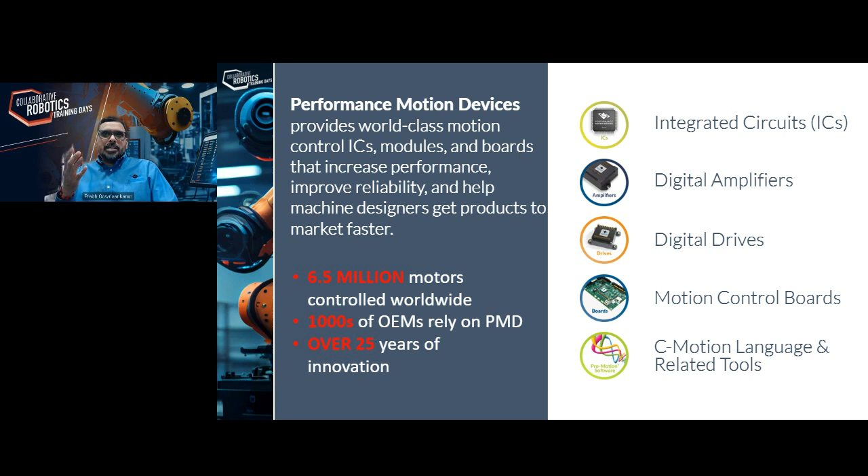And so the force sensing function may not require separate hardware. Just the controller used to control the linear actuator or motor can be used in sophisticated motor control techniques, so we'll take a look at that. Especially in the cobot case, there's a lot of force control and force feedback that you have to apply, and you can implement a lot of these in terms of algorithms for force control.

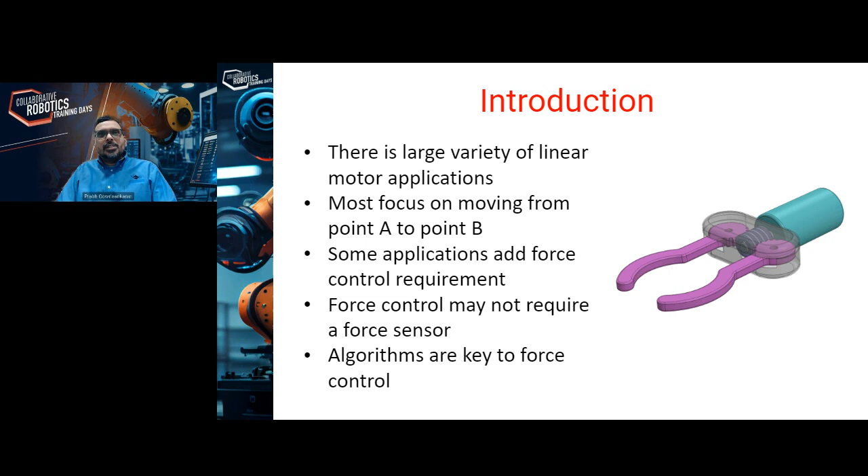So just to dive a little deeper into linear actuators, there are two different types. If you look at end effectors, you typically have linear servo actuators. There are a few different varieties, but the most common configuration is a rotary motor used to create linear motion. The rotary motor is often a DC brush or brushless DC motor, although step motors can be used. As the motor rotates, a mechanism such as a lead screw converts the rotary motion into linear motion. They come in lots of different sizes, strokes, and force output. These actuators are characterized by high force output, moderate speed, and moderate positioning accuracy.

So the range of applications of this type of actuator is vast. It includes electronic manufacturing, so you look at pick and place kind of machines, semiconductor equipment, biotech. You see it a lot in robotics and industrial automation.

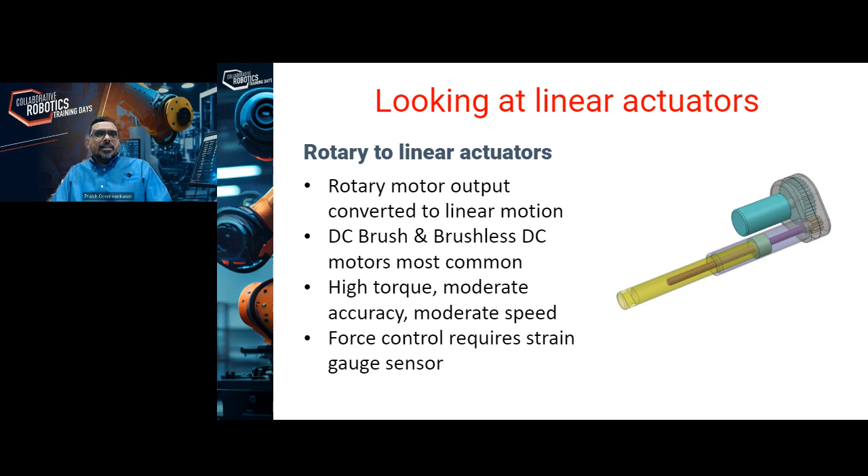So just diving in, we'll walk through a few different types that we have seen as part of controlling these motors.

A secondary category of these linear servo actuators is these direct drive brushless DC motors. They are like a normal rotary brushless motor, but these are commutated servo controlled motors, which typically use an encoder for position control. The direct drive here means the linear motion is directly generated by the motor coils and magnets. There's no lead screw or gears or pulleys needed to convert rotary to linear motion. So the linear version of a brushless DC motor is essentially an unwrapped version of a rotary motor.

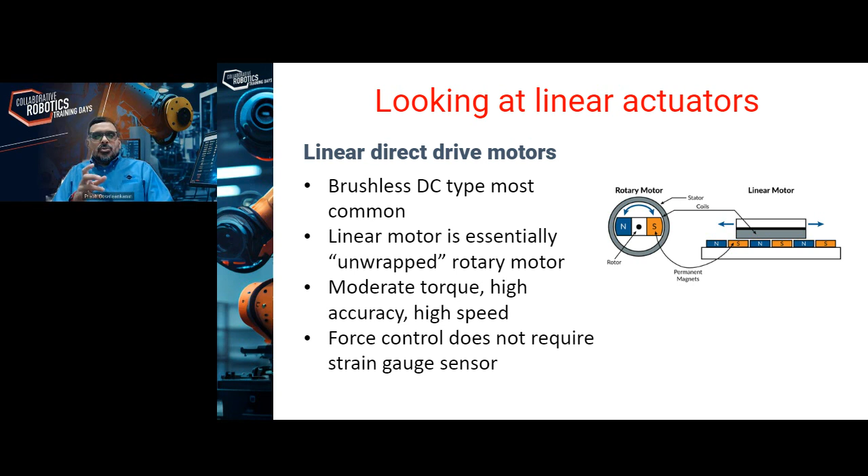Looking at a few different configurations of linear actuators, there are typically two different configurations possible for both the stator and rotor. The stator, which is part of the coil, is stationary, and the rotor, which is the moving part, is where the magnets are. In the first picture, the coil, which is the stator, is stationary, and the rotor, the part with the magnet, moves. In the second one, the stator moves, meaning the coils move and the magnets are stationary. The choice of configuration comes down to cost and mechanical considerations.

It depends on how long your stroke is and how big your XY table is. It tends to lean itself to one of these choices. The longer stroke devices often reverse what happens, with the smaller stator assembly moving along a relatively long track. So a longer stroke device usually uses the configuration on the right, and shorter stroke devices use the configuration on the left. But both are controlled similarly, giving a similar servo brushless kind of control.

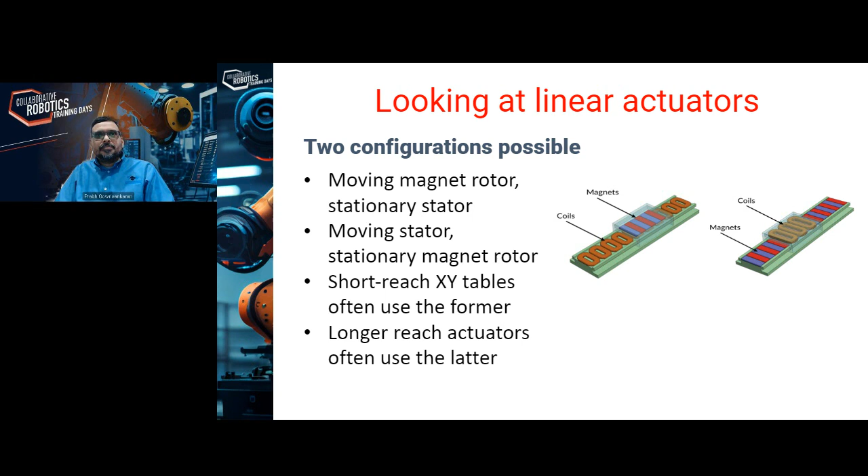There's one more direct drive configuration we have seen, which is a rod-shaped rotor as opposed to a track shown in the previous slide. The rod contains the magnets, and as before, either the rod can move with the stator being stationary, which is the coils, or the stator can move along the line.

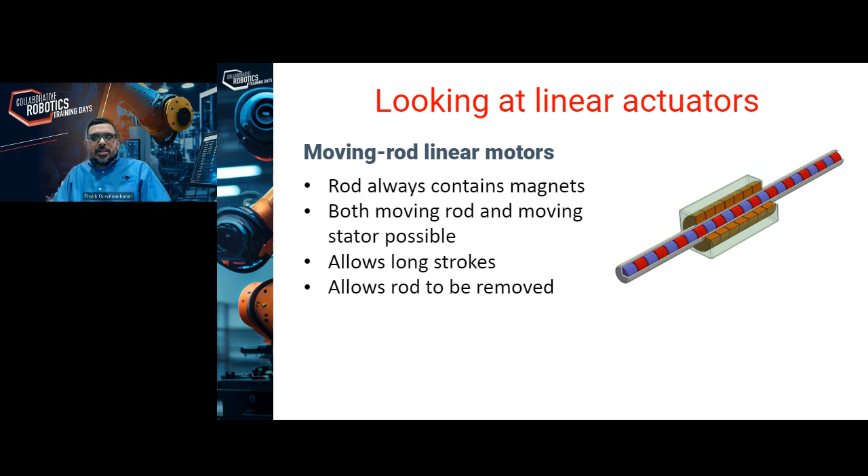Whichever arrangement you use, the brushless DC motor is the workhorse for applications needing high precision, high reliability, and quick response time. Compared to rotary ones, linear actuator direct drive motors have very high acceleration and moderate torque output. Although direct drive motors are expensive, you still find them in lots of different industries, especially where you want high precision motion.

This other category of direct drive linear actuators is linear DC motors. It has two flavors: a moving magnetic rod arrangement and a voice coil arrangement. The voice coil is something a lot of people are familiar with. The magnetic rod style DC linear actuator can deliver modest torque and speeds with a small to modest stroke distance. Its main advantage is its lower cost and simplicity. The voice coil actuator reverses the role of the stator and the rod magnets. The actuator has a shorter stroke, modest torque output, but extremely fast response time.

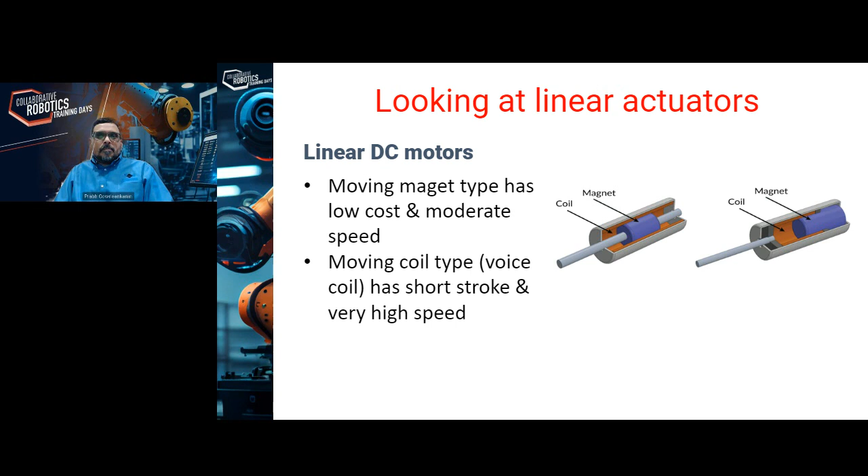So now that we have a background on a few different types of linear actuators and direct drive motors, we want to jump into how you control force. What are the force control key concepts?

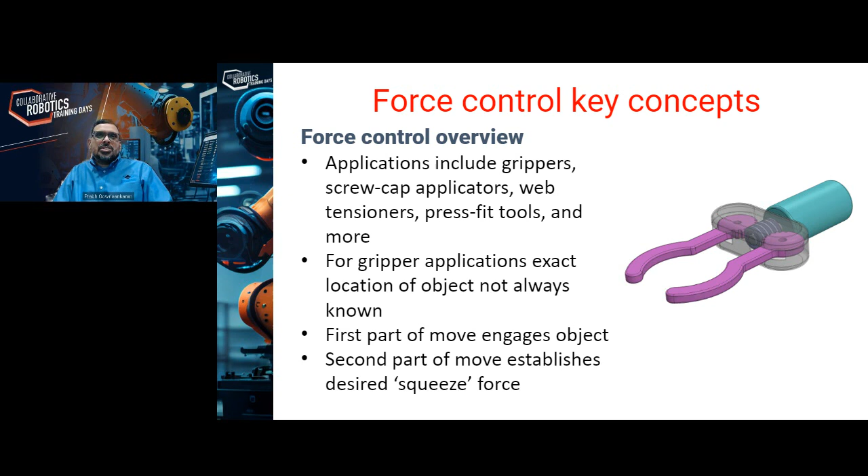If you look at applications where force control is key, there's gripper applications in the cobot space, screw cap applicators, press fit machinery, packaging. There are a lot of different use cases where force control is critical. The first part of the move engages the object, where you try to squeeze it. The second part establishes the actual squeeze force. As we go along with the slides, we'll show you how you can achieve this control, both with and without sensors.

So here you're looking at two different techniques. The first one we call the position determines the force grip method. In this approach, the actuator is controlled by a servo PID loop in our motor controller. PID stands for proportional integral derivative. It continuously monitors the motor torque output command.

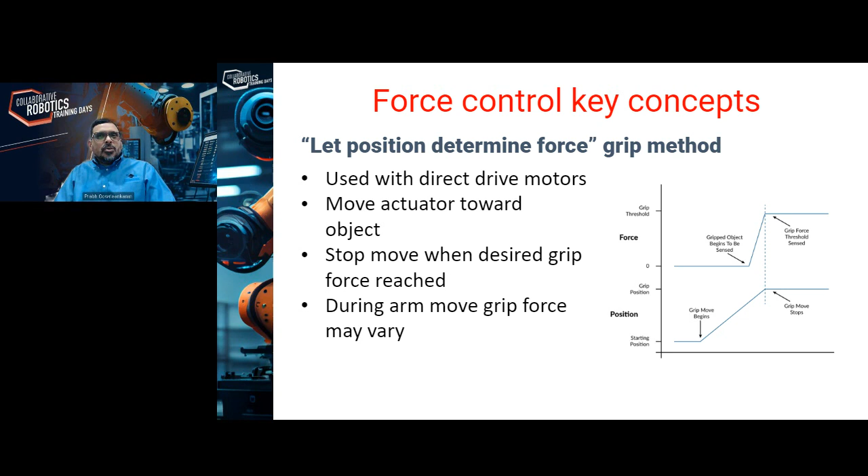The other method is where you apply a very specific force limit. We call this the set explicit force limit method. The gripper similarly approaches the object using a commanded trajectory move, but the servo loop does not monitor the force output or halt the trajectory when a threshold is reached. Instead, a current output limit is programmed into the servo loop, so that even if the PID tries to follow the trajectory, the force it can apply is limited.

It stops, the force applied is limited based on the current, and then you can continue traversing. So the trajectory doesn't end, you can continue through your path. If the object being gripped compliantly deforms or presents a different force during the actuation, the actuator position will move forward or backward in such a way that it applies the threshold grip force. These are two common techniques we've seen for force control.

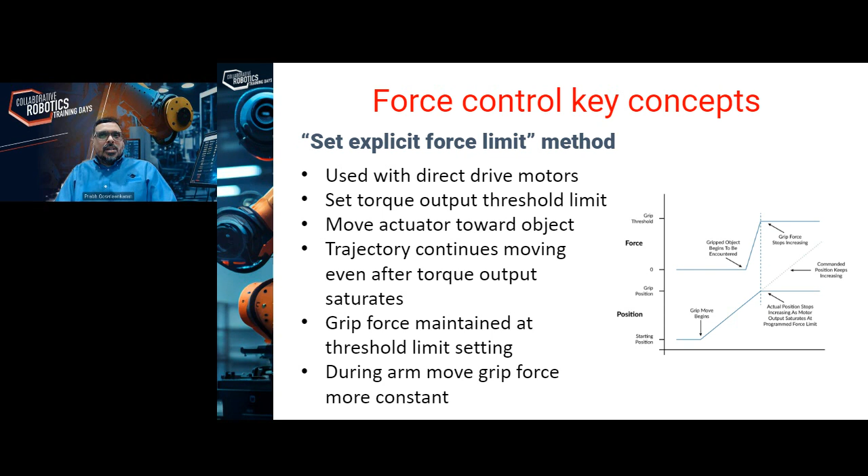As mentioned earlier, the key assumption of actual force control, if you don't have an external sensor, is that there's only a small amount of friction between the direct drive actuator and the object being controlled. So the coil current you get back is a clear indication of the force. But even geared motors can sense force if the gear ratio is modest and the gearbox is low friction.

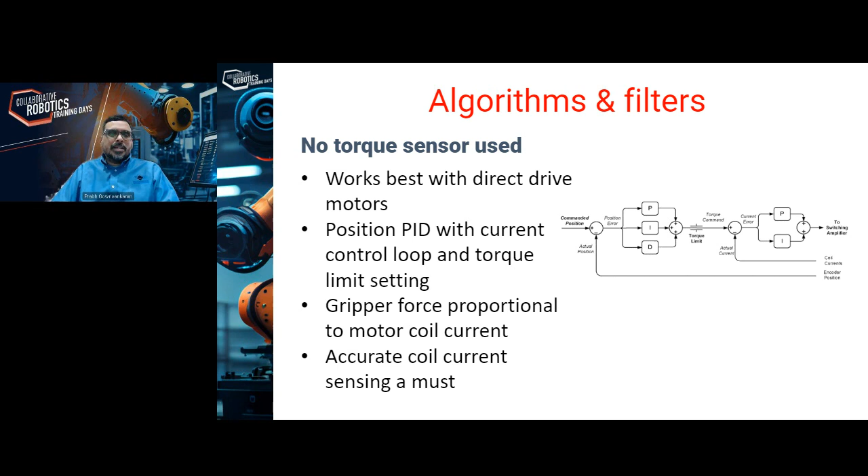The other methodology we see is where a torque sensor is used. So in this particular case, it's typically common where you have like a lead screw rotary to linear actuation or some other mechanical structure, with belts and stuff, where it's hard to measure, where the current doesn't directly respond to the force applied.

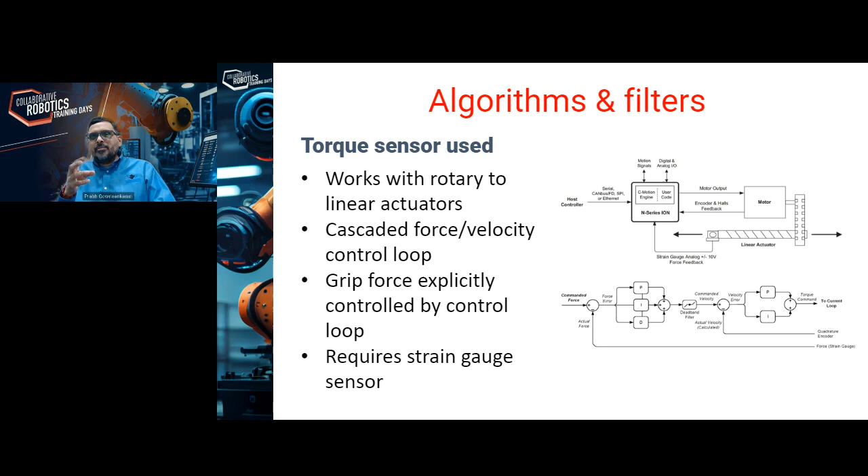This is the second one where the grip force is controlled, and then you can continue to traverse in your trajectory. Here a strain gauge is used, populated through an analog input to the drive. The commanded force is compared with the actual force measurement from the strain gauge, and the PID loop controls the force error. Then we'll talk about the deadband filter, and you control the velocity as a second stage.

As we talked about, there's also a bandpass filter in the middle. In a lot of these cascaded force velocity loops, what you see is you need a filter in the middle, called a deadband filter. It's usually put in there to reduce hunting. So when the needed velocity command is close to zero, it's not truly zero, but it's kind of close to it.

You can set a threshold, and this deadband filter will allow you to result in quieter operation, right? So where you're not hunting for the exact zero, where the precision is not needed, you want to be close enough to zero, within a certain threshold. This helps improve the loop stability, so it's not constantly trying to get to zero, and it reduces noise and saves energy.

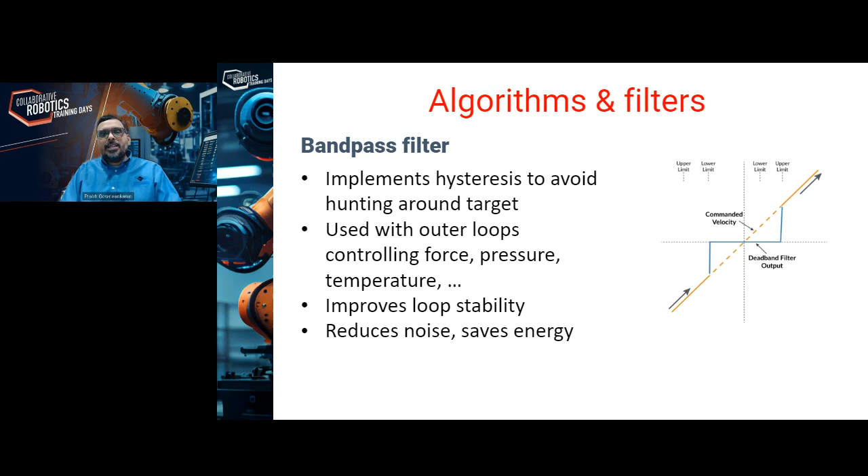So just to summarize, we walked through the different types of linear actuators. I know there's a lot of details here, but all the slides are available offline. So you can look at the different types of linear actuators available for your design, depending on whether you want high torque output, accuracy, or speed and acceleration, you can choose the type of linear actuator and linear drive to use.

And then again, you have a few different ways of controlling it. You could do position determines force methodology, or torque limit determines force. And you could use an external strain gauge or a torque sensor back onto an analog input. So there's a few different ways to control the force.

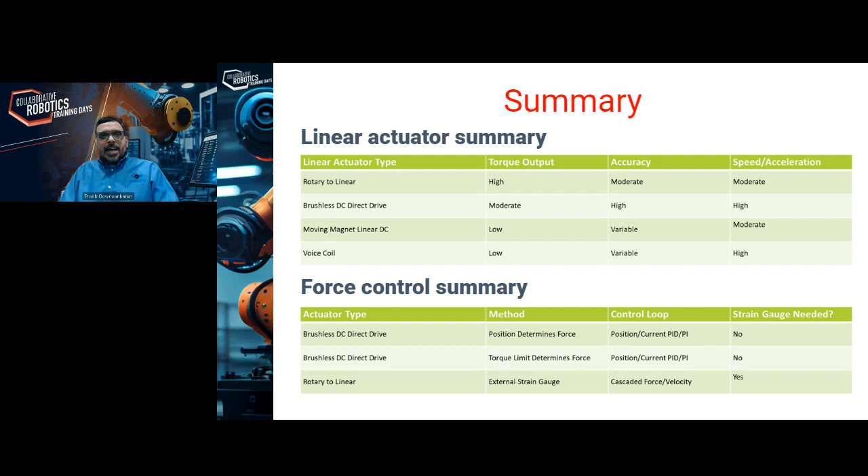So obviously at PMD, we work closely with our customers to help them understand which algorithm works better, and what are the pluses and minuses. In some cases, adding an external sensor is a lot of extra work because it's implemented in a small space. So we could do it with the control loops and setting the parameters correctly.

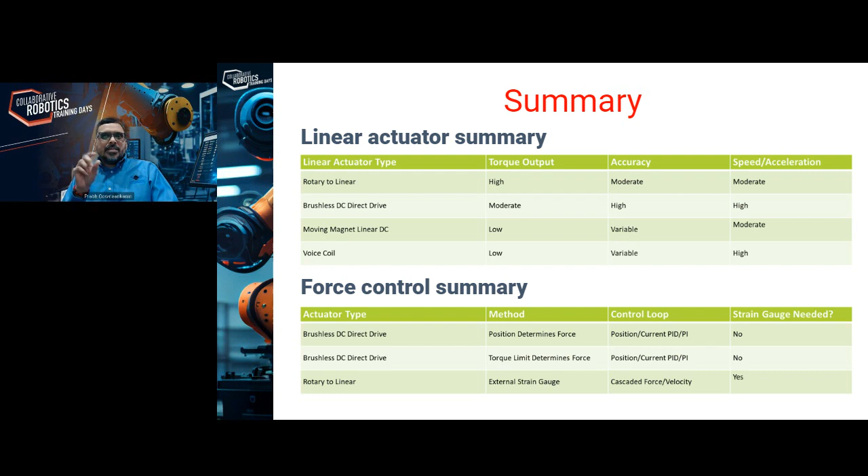So that was a quick view on the linear actuators and the force control techniques we have, both with sensors and without sensors. We can now jump into a few other robotic design challenges that we've seen with a lot of our customers.

The first one is the non-Cartesian motion, where it's not a clean XY motion. How do you solve it? Where does the math for the kinematics happen? The second design challenge is dynamic load management, where if you have variability in load, how do you accurately control position? And then we'll look at a few other design challenges.

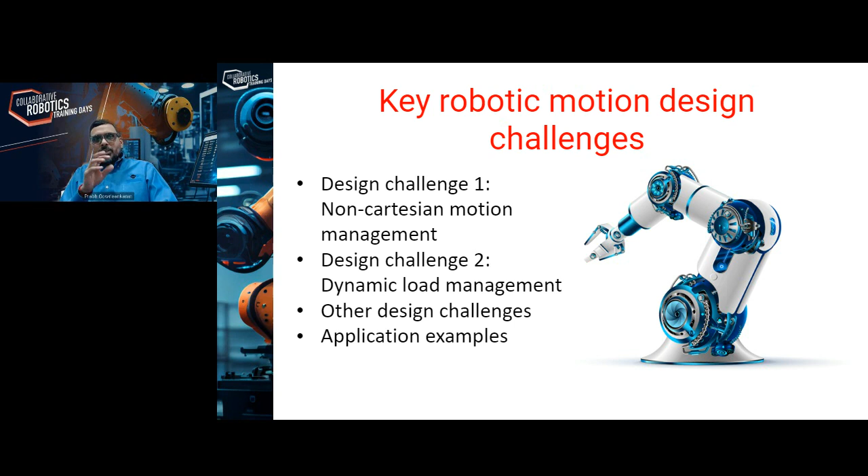So the first one is the non-Cartesian motion management, which involves path planning and inverse kinematics. Just to give you a background, I'm sure most of you are familiar with it. If you look at a simple example of Cartesian motion, it's an XY table, right?

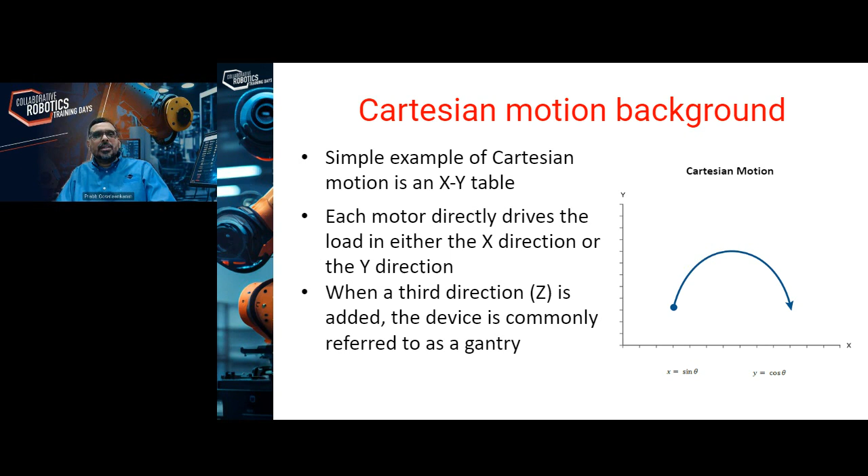If you take a gantry with XYZ, that's a typical example of Cartesian motion. You have a motor per axis, and you have to give it positions in both X and Y directions. So to get to this curve, you have to give it X position and Y position, and you can achieve this motion. This is very common with gantries.

The non-Cartesian motion is most common in collaborative robots or SCARA robots, especially with an arm. This four axes of motion is very common in a SCARA robot. The shoulder and elbow motion contributes to the destination of the endpoint, XY. As this slide shows, the X position is a combination of the shoulder joint, the elbow, and the wrist, and then there's a bunch of math done to calculate the exact XY position.

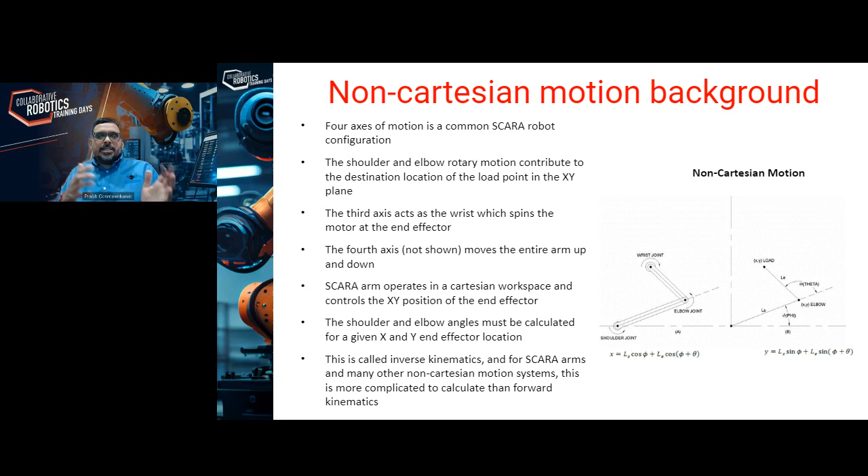This is typically inverse kinematics. We'll talk about it later. In a centralized control setting, you take a bigger ABB or KUKA robot, there's a central controller that's doing all this inverse kinematics, computing exact position and angles and sending it out to each of the joints. But for smaller systems, you can actually do some of these inverse kinematics in the controller, and we'll look at a few techniques to try to do that.

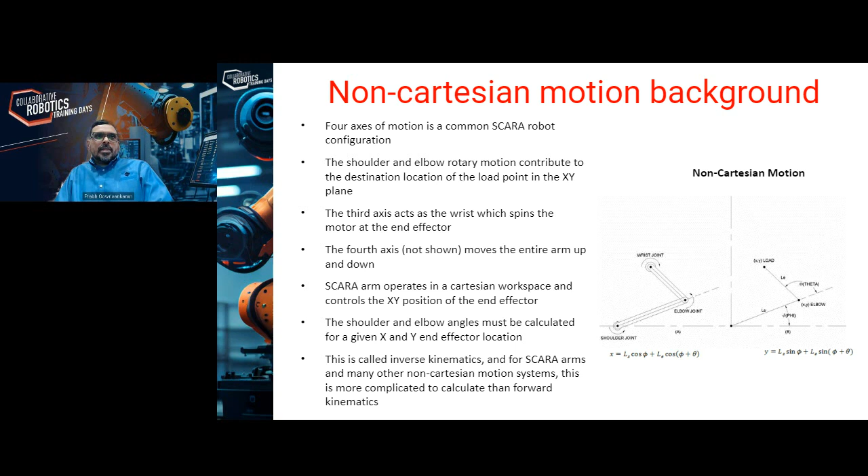The other problem we talked about is the linkages. If you look at non-Cartesian motion, the motion is not perfectly linear in the sense you have joints that might bind at certain points in the motion. So your actual trajectory, if you look at the velocity, is not perfectly linear. So how do you get clean, smooth motion from a mechanical construction that's not perfect? We'll look at a few techniques to solve that problem.

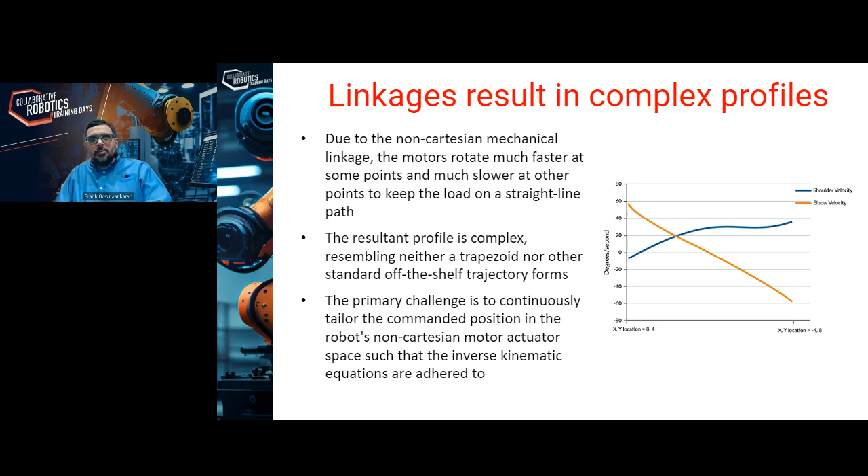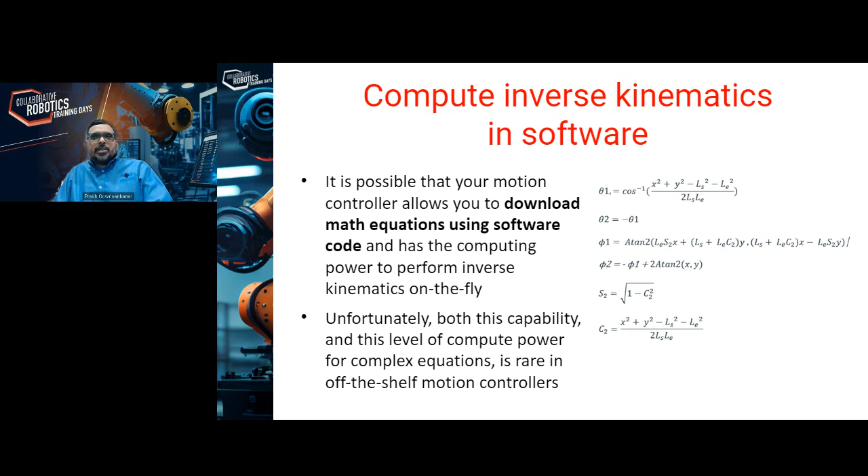Computing inverse kinematics, obviously you can do it. This just shows a list of equations that you have to solve. You can do them in software, but obviously you need a lot of compute power. In smaller embedded drives, you can still do them, but not at the speeds that you want, so obviously you want to try to come up with a way to avoid this math calculation.

So there's a few different approaches. One is we look at breaking the profile into pieces, or a segmented profile approach. You take a complex shape and break it down into individual profiles, and then you have these breakpoints that say, where are you now? And then you can implement them with breakpoints.

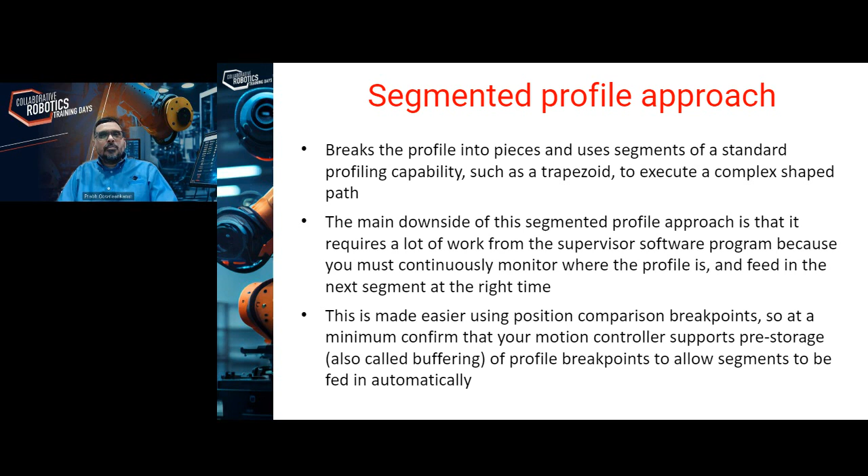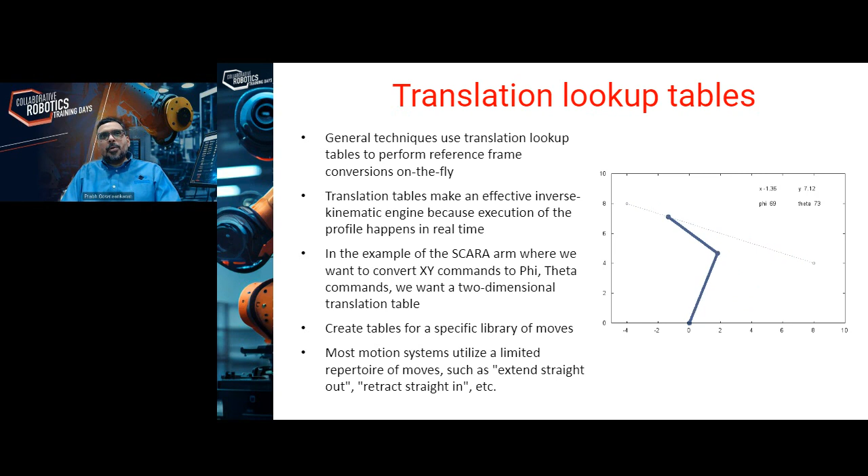This is very common in a lot of the mobile robotics applications. So that was a quick view on how to solve some of this inverse kinematics - you can try to do it through a translation lookup table, trying to avoid having to do the math in your software. The other part we see a lot is this dynamic load management.

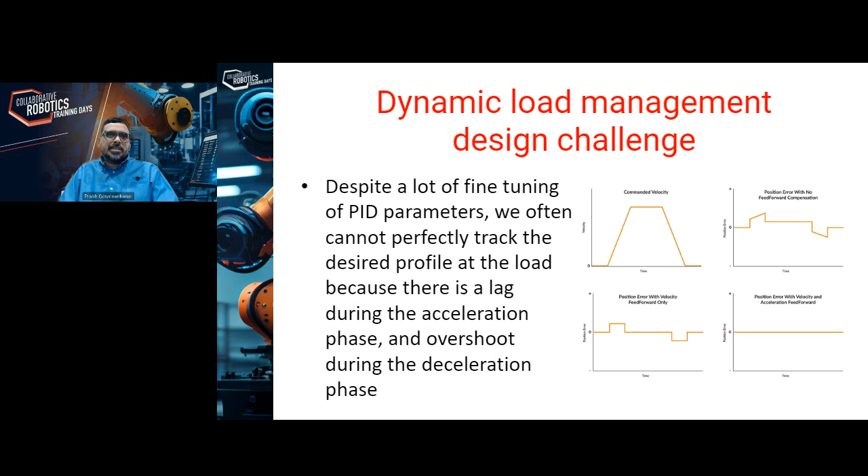There's a couple of solutions with intelligent feed forward and compliance compensation. What happens is typically you would try to fine tune your motors and the loops for clean, precise motion. But even despite trying to do all the PID tuning of all the parameters, you cannot perfectly track the profile because there's either a lag during acceleration or an overshoot during deceleration, as the pictures show on the right, so it tends to lead to inaccurate positioning.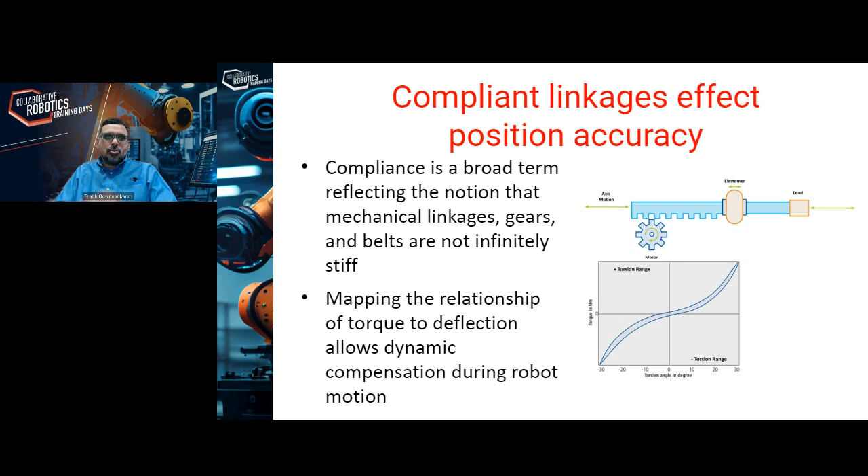Compliance, again, is a broad term, but if you have mechanical linkages, gears, or belts, they're not infinitely stiff. So if you do the map, you'll have a zone, and you'd have to do a little bit of dynamic compensation during the robot motion to have precise motion. So what we've seen used, what we do a lot of, is this feed forward to improve your position accuracy.

You can actually introduce a feed forward table to your PID loop, and in the lab, as in manufacturing, you can calibrate these. Based on the mechanical construction of your machine, you can figure out the torque deflection table, and there are some techniques to figure them out. In terms of the controls, you apply them as a feed forward into your PID, adding it in as you compute a position error. This helps you get much better position accuracy as you're trying to move through.

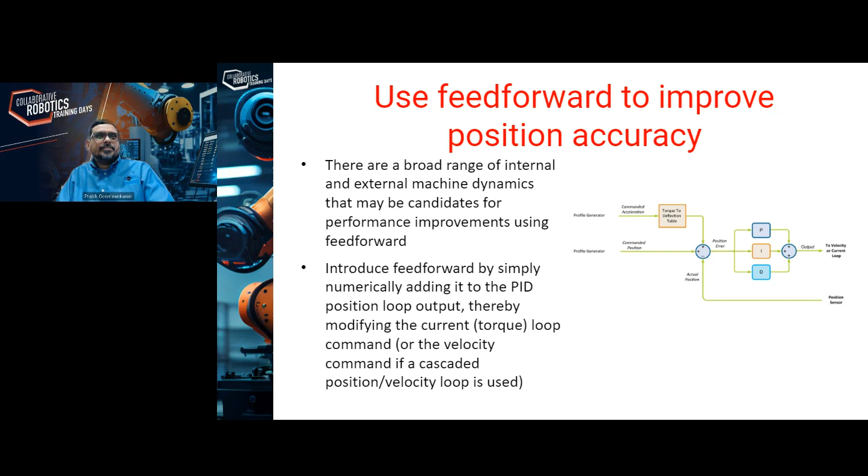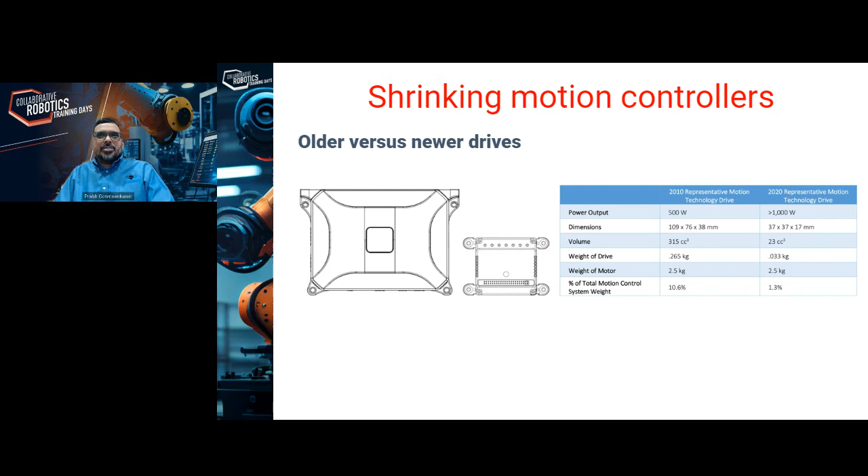It's a pretty small 1.5 by 1.5 drive, a 3-card stack. It has a CPU that the user can download code into, our motion processor chip on one of the cards, and a power amplifier, and it can drive up to a kilowatt of power. The onboard CPU lets you download user code to do all the intelligence associated with that particular axis, and you can connect to it via CAN, Ethernet, or serial.

So what you need when you have a cobot is one of these drives per motor, and the only wiring that's needed is your network connection, whether Ethernet or CAN, and power. This opens your options for newer control architectures.

What's inside, as we talked about, has a C-Motion engine, the processor you can download code to. It supports newer encoders that are becoming more popular, like serial BiSS and SSI encoders, and sine cosine analog encoders for very high precision motion. For safety, it also has 2 separate voltage supplies, HV and HV-aux. The HV is for high voltage, and HV-aux stays on for low voltage, low power stuff, so you can still report faults and failures. That's pretty popular in the cobot application.

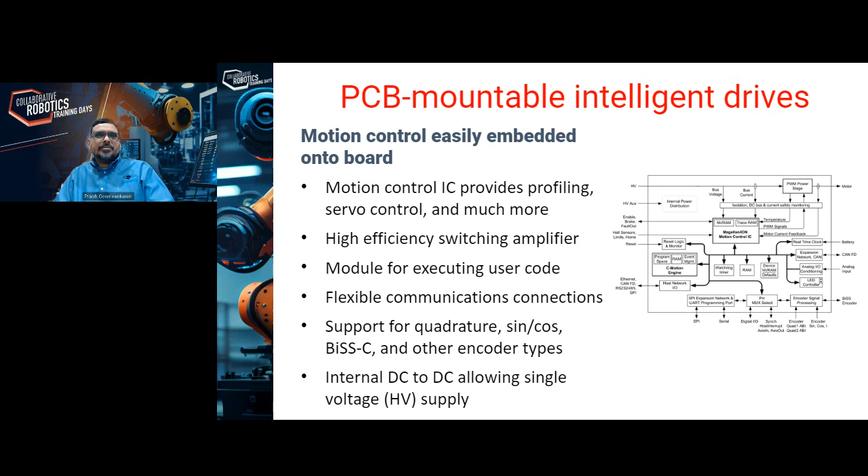The other nice part is the same drive controls all different motor types. So if you look at the linear actuators we talked about, those are brushless DC motors - from our viewpoint, they look like a brushless DC motor, so you can control those, but you could also have simple stepper axes, like closing and opening a door or a valve. So the same drive can be used for controlling all different motor types.

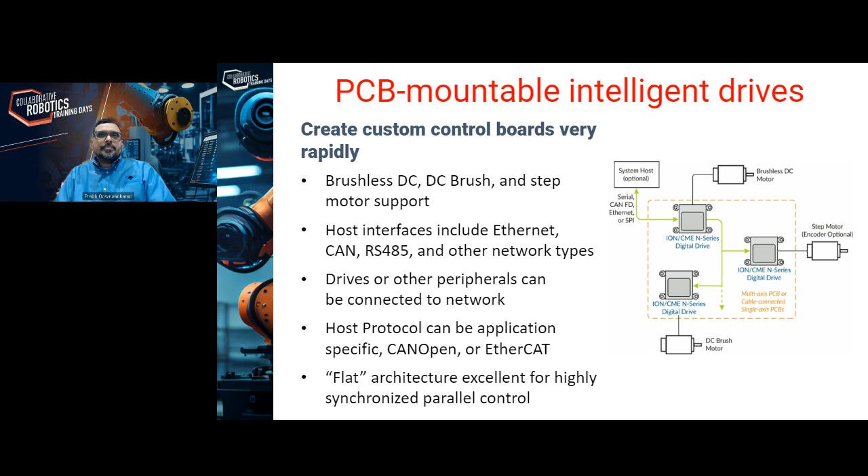It's essentially a solderable drive, so you can make a small card with your own custom connectors, giving you the customization you need without having to do your own design. The card you solder it to is very simple and provides all the IOs that you need.

You can write C code and download it to the C Motion engine, and you can have the intelligence. We have a few applications that are battery handheld kind of applications, so there's no controller. All the code's running on the drive locally, and you can control the motor with that.

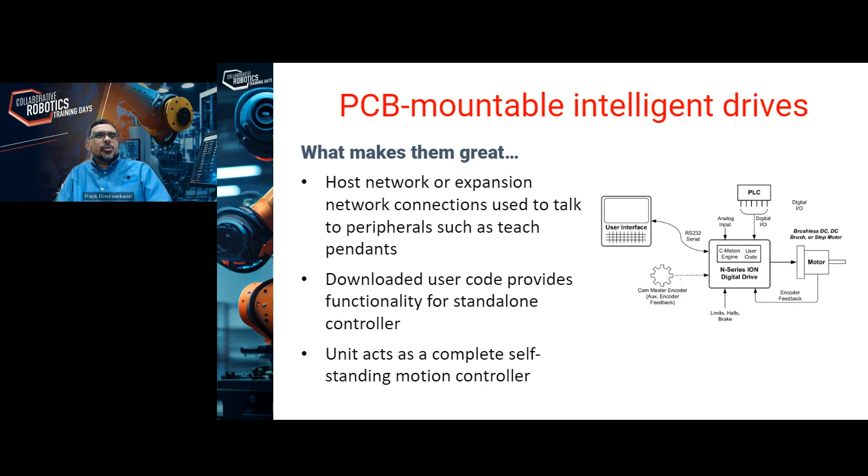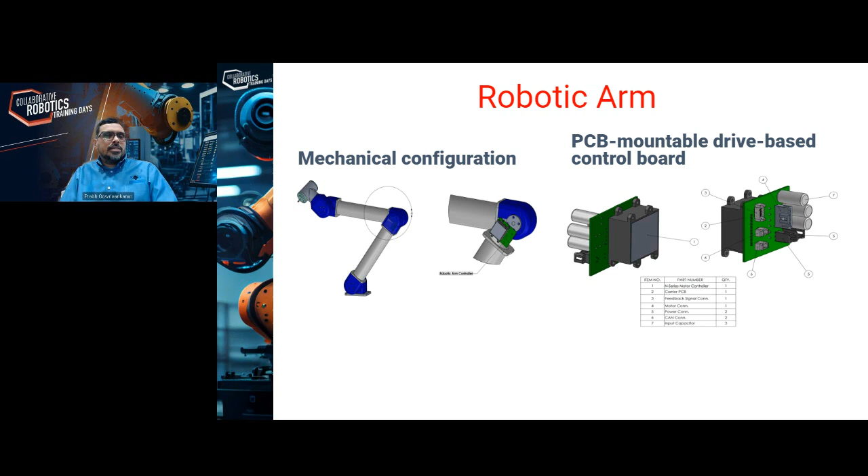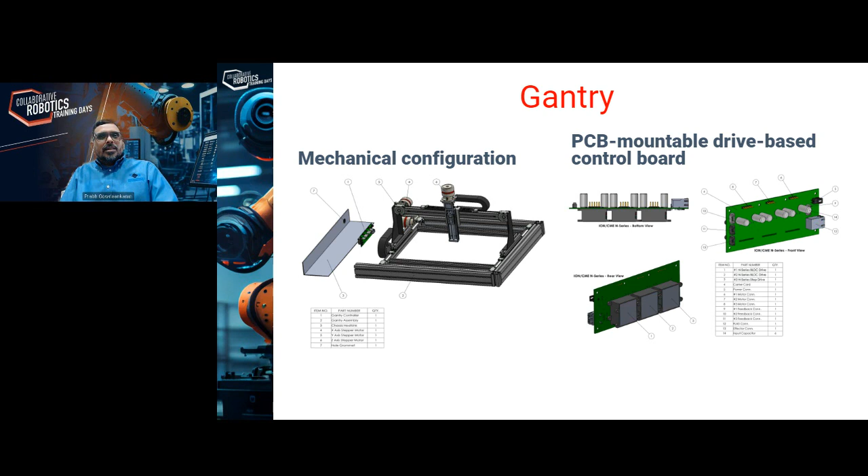So that kind of gives you a quick overview. I started off with force control and linear actuators just to educate you on what's used, typically for the end effectors and grippers. We then talked about a few control techniques to get the force sensing with and without torque and strain gauge sensors, and we talked about cascaded loops and filtering in between. Then we looked at a few other robotic challenges: the Cartesian versus non-Cartesian motion, the dynamic load management, translation lookup tables. And then we ended with looking at our drive solution and a set of typical applications.

I know this was a lot that we've covered, but you can always go back and look at the slides to kind of look at the flow of it. Back to you, Steve.